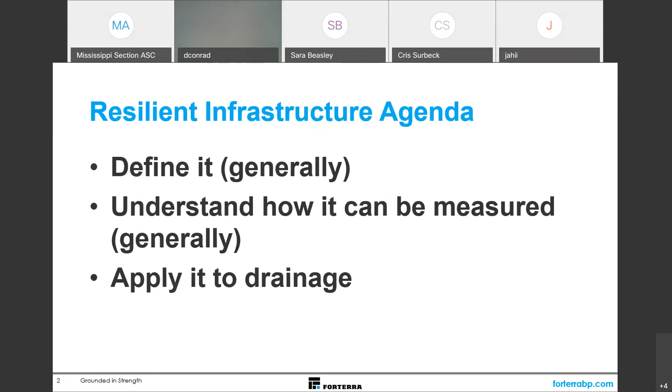You're also an English major, so we go to the dictionary. There are actually 2 definitions. One is capable of withstanding a shock without permanent deformation or rupture. And the second is tending to recover from or adjust easily to misfortune. And that's certainly true with our infrastructure, no matter what it might be, whether it's pipeline.

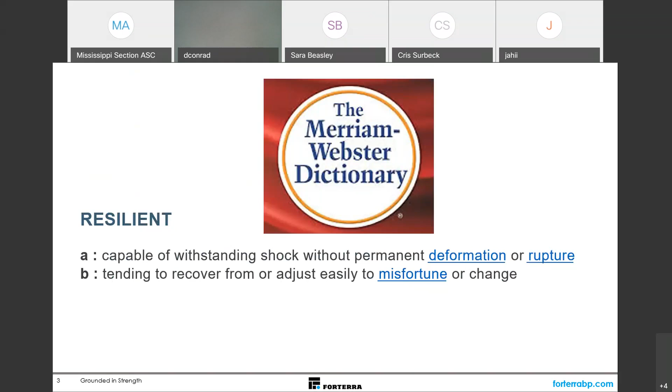This first question is off of this slide. I wanted to show that there are several universities in the country that have programs directly instructing on resilience: one at the University of Illinois, University of Georgia, one of our SEC schools, they have a PhD in engineering; Georgia Tech has an infrastructure systems research program; and Vanderbilt up in Nashville has a master's degree in risk, reliability, and resilience engineering. I'm sure there are other universities throughout the country with resilient programs, but these are 4 that we looked at.

The importance of resilience: number one, we want to improve the overall quality of the infrastructure systems. Secondly, we want to reduce long-term costs. Many times you might design something for the short term, but long term, as much as we spend.

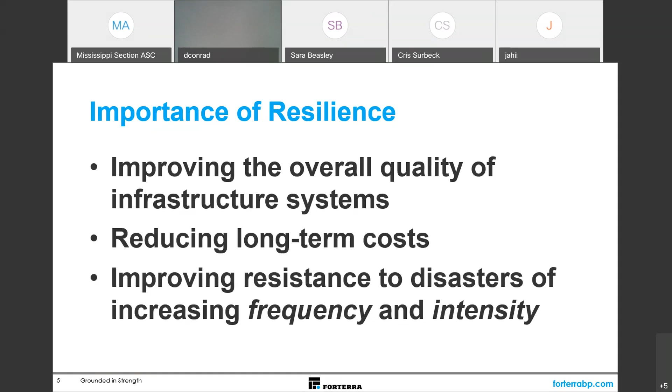Okay, so now we're back, I guess. So the second topic is reducing long-term costs. When you look at a project, of course, you want to look at not only the design and construction initially, but also in terms of maintenance and cost down the road, again, from misfortune that may come about. We want to improve resistance to disasters, and these are becoming more frequent and more intense.

Jennifer just went through the 2020 Mississippi Infrastructure Report Card. This is the last one, the national report card. And our grade, unfortunately, on the national scale is from 2017.

A D plus this year as well in Mississippi. So we haven't made much progress, unfortunately. The 2013 grade nationally was a D plus as well. So even on the national scale...

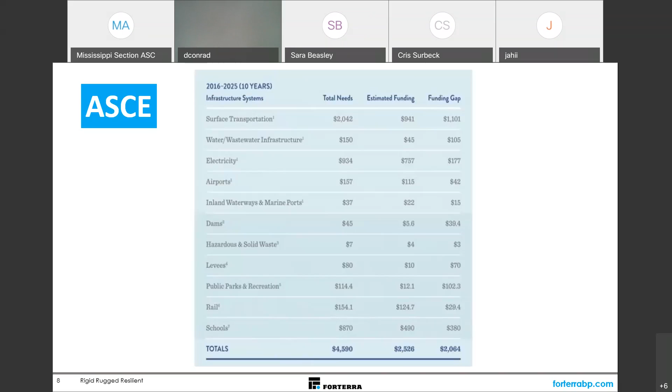This gives you an idea of the funding gap. You can see all the systems that are there. The funding gap, if you look, and this is from 2016 to 2025, 10 years, the funding gap is a little over $2 trillion. And that's quite a sum of money. And being a supplier and watching what funding is coming from the federal government and from the states, I don't see that making up a lot in that gap.

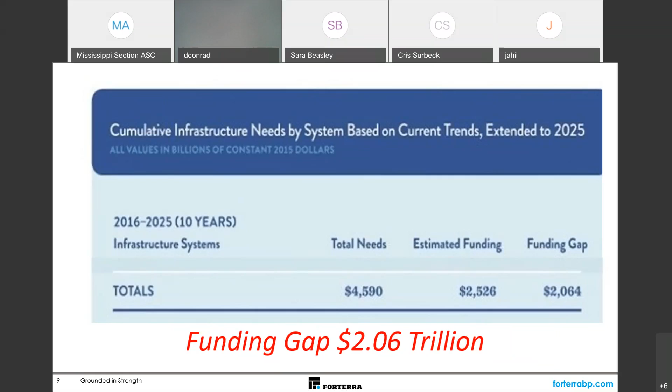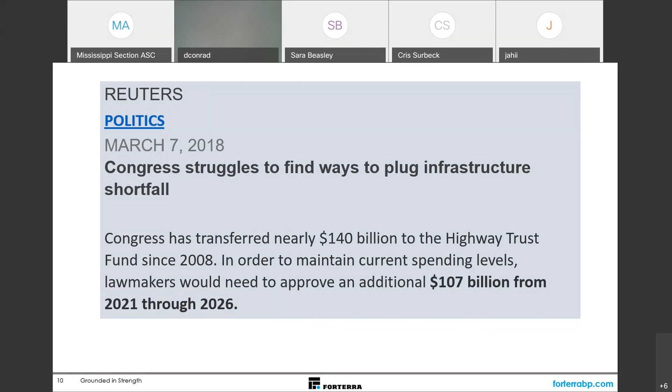This is from 2018, and we know Congress struggles all the time, but they struggle to find a way to plug the shortfall. Nearly $140 billion to the Highway Trust Fund. However, if we want to maintain those current spending levels, the lawmakers need to approve an additional $107 billion from 2021 through 2026.

And the key here is to look at resilience. You save a little today. A lot of times the low-cost material choice is the first choice. And of course, we all are aware that the majority of the time, the low bidder, the construction company that's the low bidder, is going to get the job. And sometimes that's okay, and sometimes it's not. And I'm sure all of you are aware of the different construction companies throughout your state, the ones that do a good job and some that may not do a good job. So the low bidder, even though it's what we want from a cost standpoint, sometimes it comes back to get us later.

And of course, if these occur, then you can pay a lot more tomorrow. Number one, premature failure. We had a situation with Mississippi DOT in Brandon just a couple of weeks ago, where unfortunately they had some concrete pipe that had been in the ground for 60 years, and the joints, because of the soils around Jackson that move - and you all in Jackson are certainly aware of that, especially if you're a geotech - they decided to take that out, but they got 60 years out of the pipe, so that's pretty good.

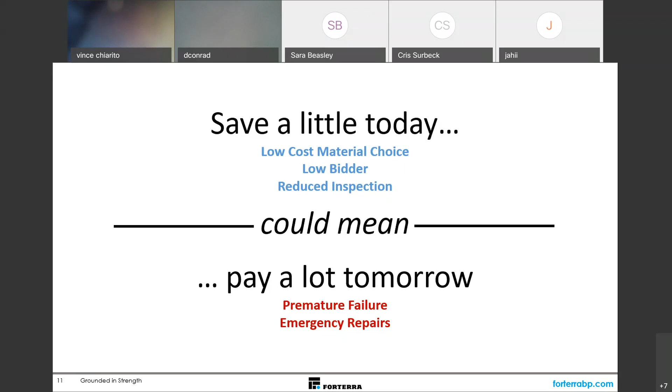And what happens is it's sort of like a parking meter. You know, you can get by with not putting money in a parking meter. You might get by 15, 20 times. But then at some point, you may end up getting a parking ticket, and that can be $40, $50, which will well outweigh what you may have paid in parking along the way.

Also, our phones - another situation that we have is our phone. Almost all of us, I guess everybody that I'm aware of, uses some sort of case for their phone, because inevitably we're going to drop it. And even sometimes the case does not do well, but that cost for the case certainly outweighs what might happen if you drop your phone and have to either replace it or put a new screen, whatever the case may be.

When we look at resiliency, and this is from an article out of Canada shown down at the bottom, their equation was resiliency equals future proofing. And their definition of future proofing is defined as the ability of an asset to continue to be of value into the future. And that's important - the assets for government, and it's important because they want it to continue to be of value. And it also, when you have resiliency built in and you future proof, it's required to ensure that taxpayers are being provided with value for their money. And the public certainly is expecting that today.

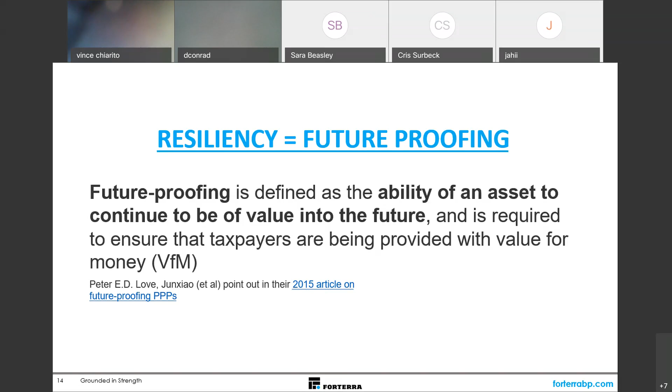This is from the National Center for Environmental Information. This is from 2019, and this was the weather at $1 billion. Each of these disasters shown here was $1 billion last year.

You can see, of course, we all heard about the fires out in California. We don't have to deal with that very much in Louisiana and Mississippi, thankfully. Texas does have an issue, but some of the others, and you can see the severe weather that was shown there, and tornadoes also. And of course, the tornadoes in April were quite unique. I'm sure you're aware, you had 3 EF4 tornadoes in a week, and that's very unusual.

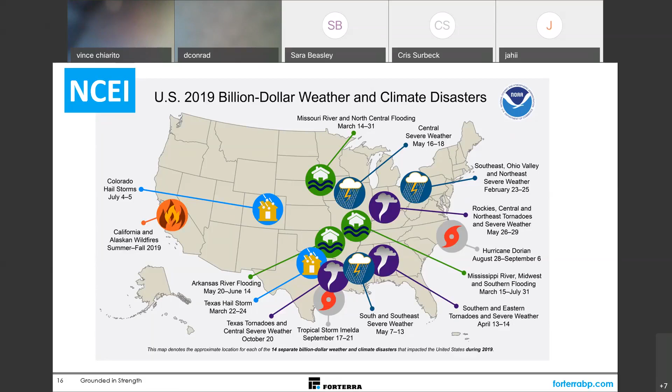One of them, I don't remember what day, but it came very close to our plant in Prentiss, Mississippi. Prentiss is about halfway between Jackson and Hattiesburg, and we were very fortunate - there was no damage at the plant. However, a lot of the employees had damage at their homes and their property. So it really held us up because we had a lot of people out, and not only that, with COVID, the same situation.

This is some of their information. You can see they've gone back all the way into the 80s. And you can see the numbers, and of course they just keep getting bigger - the number of events and the number of dollars keep getting bigger and bigger.

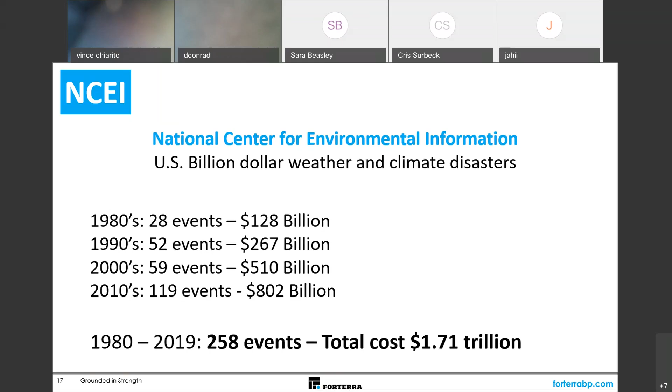You can see $1.71 trillion, quite a bit. And then this year, they didn't have complete numbers, but as of April, there had been 2 events that were over $1 billion, and it could have very well been your tornadoes in Mississippi. Could be one of those. I do not know, I didn't see the number on that.

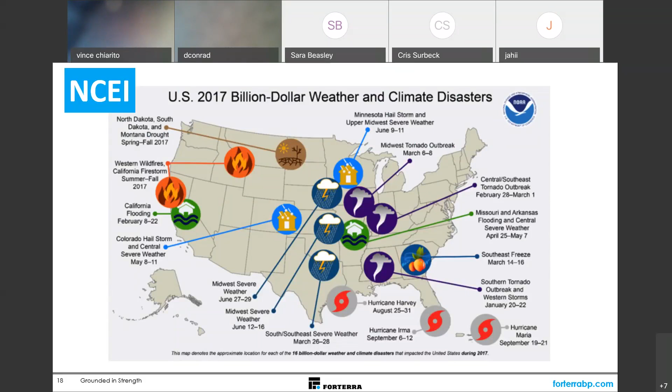This is from 2017. You can see all kinds of issues - again, the wildfires out west, tornadoes here, the hurricane that hit Texas, that was in 2017. So there are all kinds of opportunities for problems. 2018, through January through September, same situation - tornadoes, fires, hailstorms, all kinds of different natural disasters.

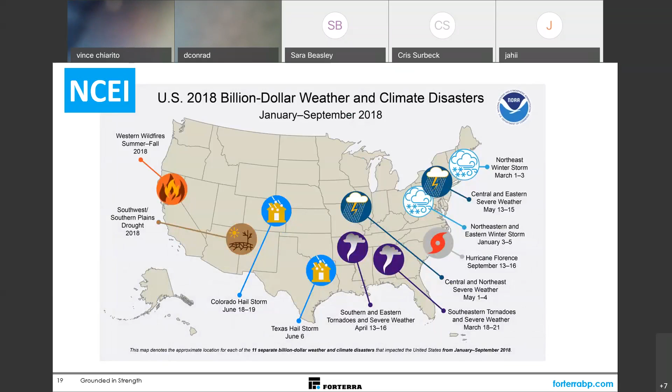So the natural adverse events, and of course we're very familiar in both Louisiana and Mississippi, the flooding, extreme heat, wildfires, earthquakes, tornado, and hurricanes. And those, almost all of those, can affect you and can affect the infrastructure that you have designed and built over the years of your careers.

Also, of course, we have man-made adverse events. We have system overload for one reason or the other. We also have oil and chemical spills, vehicle accidents, and then terrorism and vandalism. Thankfully, we see more vandalism than terrorism.

This is from the University of Buffalo. There's a PhD there, he came up with this triangle, this 4 R's of resiliency and resiliency triangle. And the point is, you can see over on the left, on the vertical axis, you've got the condition of your structure, and then you have time on the right, and then you have an event, and then a functional level. So he looks at this.

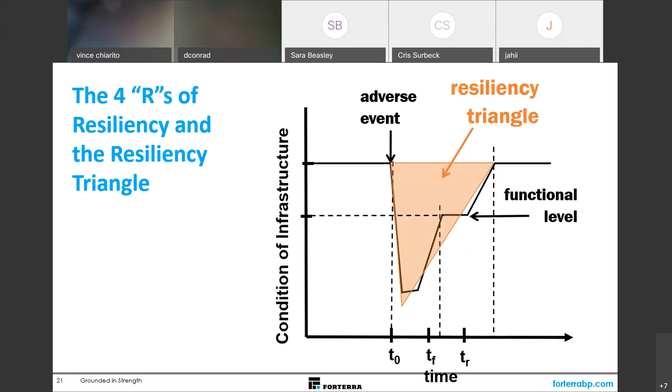One thing to keep in mind, I did a little research on this - the gentleman that did this was looking at earthquakes. He was not looking at events that typically we would see here in the Southeast. And that's what the triangle looks like - of course you see the event, and then the condition of the infrastructure goes down. You have a period of time, and then it gets back up to a functional level, and then finally, hopefully, back to the initial structure quality.

The first R that he talks about is robustness. And this is a higher level of initial quality that's able to withstand unforeseen demands. And it's important for all your systems - it makes no difference. Most of what I'm going to talk about is drainage, but whatever systems that you all are designing, they need to be robust and of a very good quality.

And you can see on his triangle here, when you talk about robustness, you may increase that condition of the structure ahead of time, which results in that resiliency triangle being smaller and the time frame, which is most important, being shorter as well.

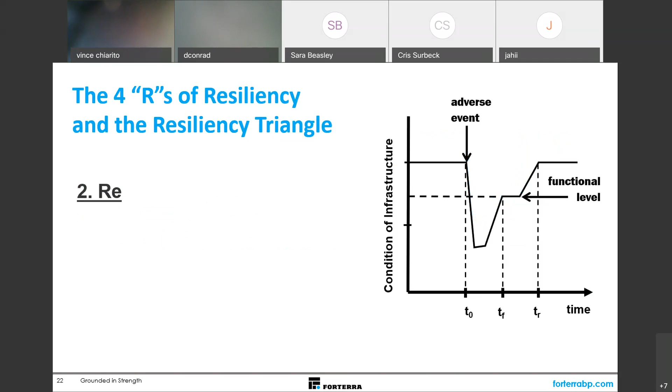Redundancy - the definition is a measure of inbuilt sustainability that can keep infrastructure functional during an event. And it depends on, again, what you're building. In his case, looking at earthquakes, he was more concerned about how buildings and external structures could be built with redundancy to keep that from happening. And you can see if the redundancy is built in, then hopefully the function level will be higher - you won't have as much of a triangle there to get back to a normal condition for the structure or for the infrastructure.

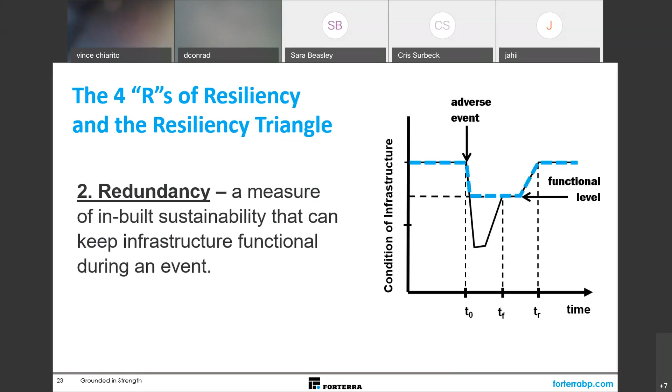Resourcefulness, from an operational standpoint from the owners, is their ability to minimize and contain the negative adverse event. If they're resourceful and ready, everything gets back to normal pretty quickly. One analogy I can use, not in Mississippi but here in Louisiana, was the pump system around New Orleans during Hurricane Katrina.

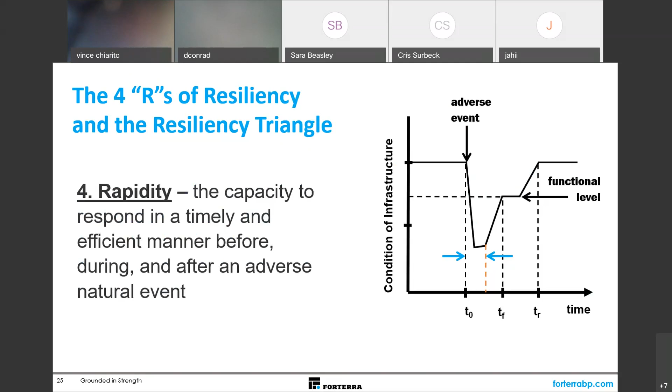The resourcefulness is very important to minimize those negative effects. Then the last is rapidity, which is the capacity to respond in a timely and efficient manner before, during, and after an adverse event. It's important to be able to get in and get things back to normal. Again, during Hurricane Katrina that did not happen, and of course some of that happened on your Mississippi Gulf Coast as well during that event.

To respond is organized and thought about beforehand. I want to back up one minute. I did this one, as I mentioned, for earthquakes. I did find that the American Road and Transportation Builders Association has 4 R's of resiliency for transportation, and it was a little bit different for robustness. They talked about having movable barrier technology in work zones to be able to get things back quickly.

Redundancy, their topic was to replace trusses with cable-stayed and network arches on bridges. They were speaking about bridges directly. Resourcefulness, it was very interesting, they talked about mapping GIS systems and redirecting traffic, and that's obviously important as well.

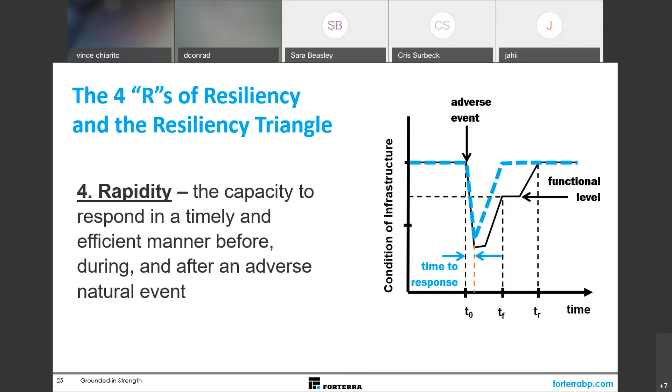And then the last, rapidity, they discussed. One thing that we in the precast industry push all the time is accelerated bridge construction, and we work through the American Concrete Pipe Association and through the Federal Highway Administration on accelerated bridge construction.

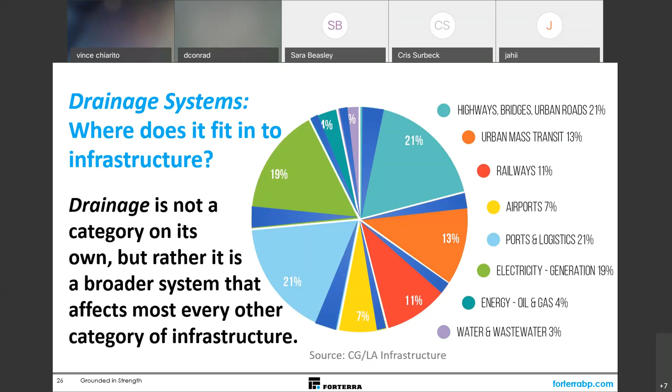Now, adverse events affecting drainage systems, there are many. We looked at them earlier with the billion-dollar events, but we have fire, flooding, vandalism, earthquakes, and shifting soils. That hits home in the Jackson area for sure. Thankfully, we don't have to deal with freeze-thaw very often. Vehicle accidents, everyone has to deal with those in the aftermath, and then extreme temperatures. Certainly Mississippi has extreme temperatures, mainly on the high side, but extreme temperatures are certainly part of it.

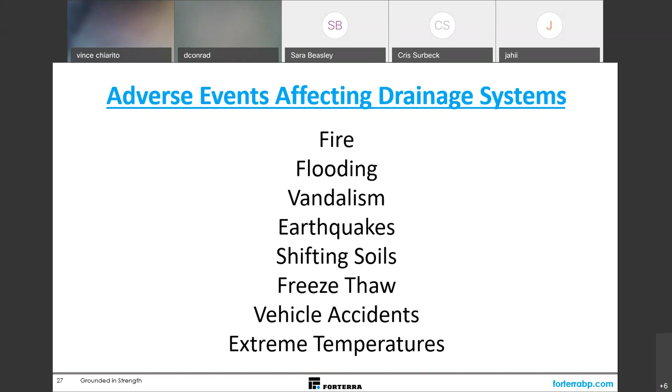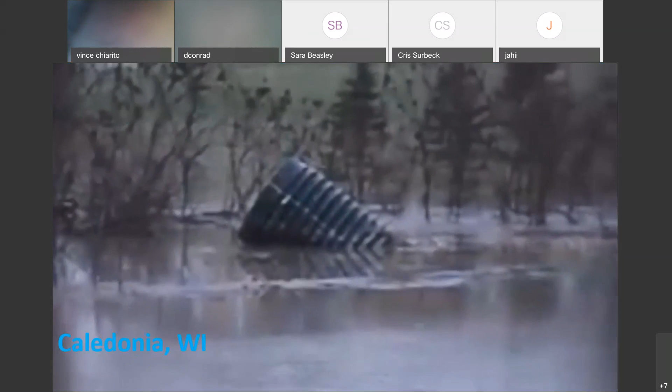We're going to look at flooding. Of course, any kind of flooding affects the drainage pipe. I have some videos here. This one's in Wisconsin. Luckily, it doesn't appear, based on this video, that the roadway was damaged, at least not major damage. But the culprit here is the pipe in this case, and that occurs rather frequently.

This next video is from East Texas. It has some rather colorful discussion about what's happening.

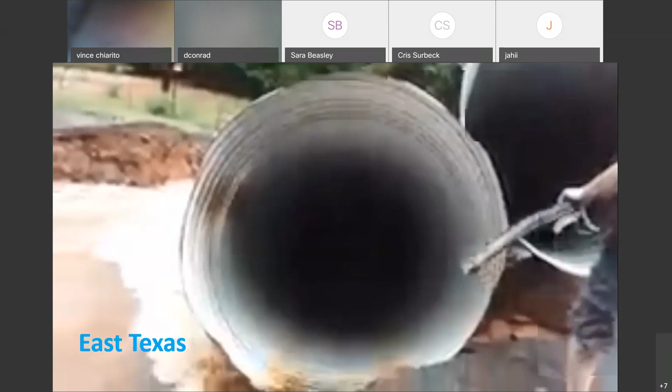I don't see it on either end. I didn't see any head wall on this pipe, and obviously that creates issues if you just put pipe in and it's not sized properly. Without a head wall, it can create problems, and you can see here, obviously this was a serious rain event that this occurred.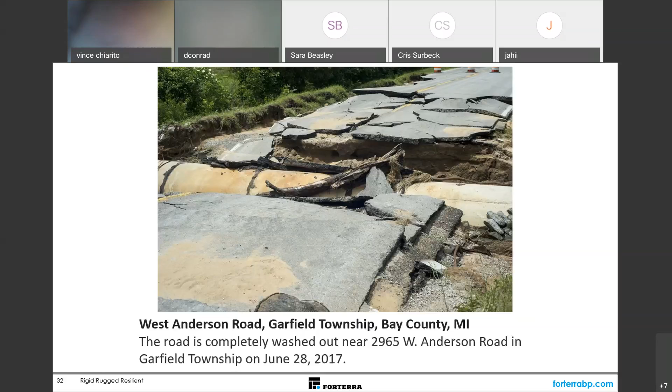We don't know all the details about this, but obviously this is a pretty serious failure. Again, typically you can see it's a 2-lane road. We can't see whether there's head walls or wing walls on either side, but this type of failure occurs to every type of pipe.

This is one up in Georgia, back in 2009. It was corrugated metal pipe. The key here, and I'd venture to say all the engineers on this webinar would agree, is that there's no reinforcement in that head wall. I'm pretty sure any engineer designing that head wall would put in some rebar or reinforcement. My guess is the contractor didn't put it in to save some money. So even with a head wall in this situation, you can see you have issues all the time.

This is up in the Atlanta area, where they have that red clay, and when the water gets started in there, it erodes quickly. So the system obviously failed, and the biggest problem here was the detour around this road, which caused a lot of public issues.

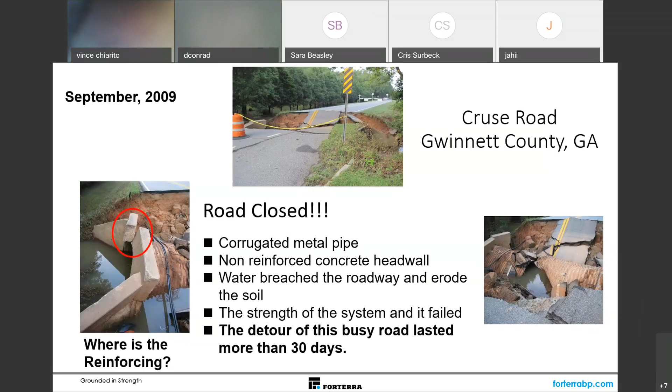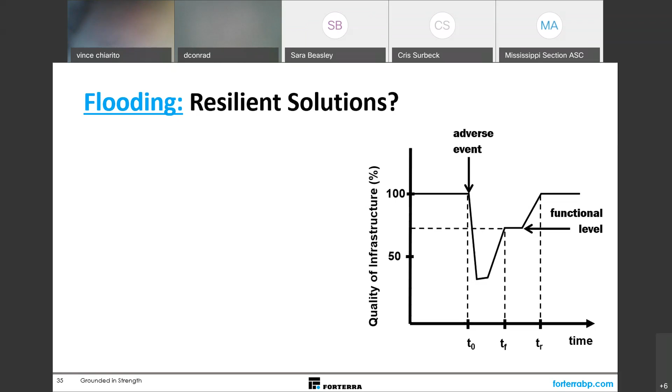For flooding, let's go through the question. Number one, a resilient solution is to build a proper head wall to provide scour protection around the inlet. As we've seen in these previous pictures and videos, a proper head wall is important. The precast concrete industry offers precast head walls, wing walls, and aprons, but most engineers, probably 95% that I've dealt with, prefer to have the contractor cast it in place because of issues that may occur if things don't line up, and I certainly understand that. But we certainly recommend that you put a head wall around your pipe.

Second is, of course, to use riprap to reduce the velocities, using non-floatable material, and then oversize the culvert to avoid a submerged inlet. Now, that last one, if you have to oversize a culvert, it's going to cost you a lot more to start. So hopefully you can use the other three topics to make sure that if there is flooding, you don't have those issues.

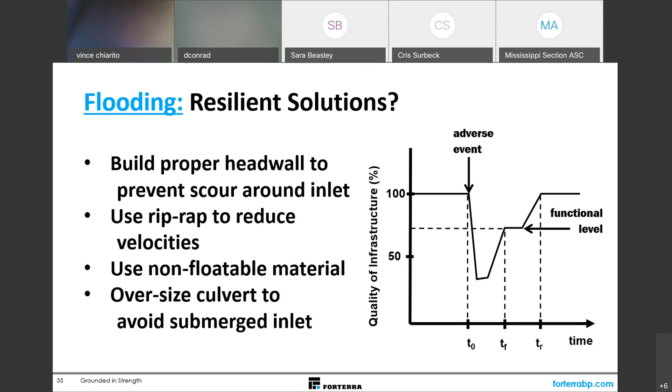Wildfires are not typically a problem in your state in Mississippi, or here in Louisiana where I am, but they are an issue. This is from Stoneburg, Texas, back in 2009, and they had wildfires. I'm assuming Stoneburg must be in the western part of the state, but a wildfire ignited a triple line of 60-inch HDPE pipe, and the road collapsed. You can see the collapse there. Emergency response vehicles, there was one that ended up down in the ditch.

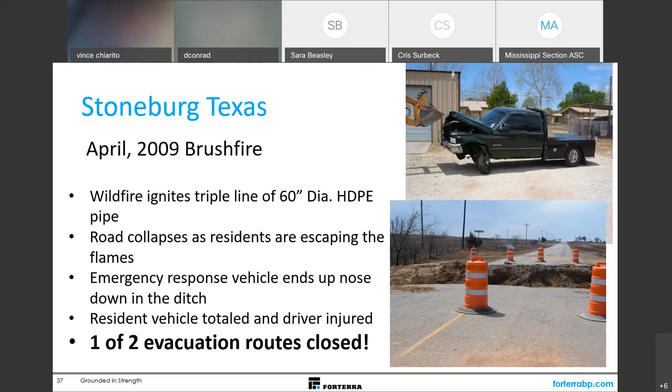And a resident ran into it as well and was injured, as you can see in the picture on the upper right. Thankfully, nobody got hurt seriously, but the bigger issue for them from a brush fire situation is that from that little town, there were only 2 evacuation routes. And so when this occurred, they have a difficult time getting into this little town.

Now, as a result of that brush fire, the Texas DOT revised their use of plastic pipe. The restrictions that they put on roadways with current ADT less than 2,000 vehicles per lane: the inside pipe diameters no greater than 36 inches, so they limited the diameter. And multiple pipe installations will be limited to a maximum of 2 adjacent pipes. And then for pipe installations beneath and adjacent to the road...

...safety end treatment. And of course, the reason for that is that the concrete won't burn. So if a wildfire does come through and it does get to the culvert, it's not going to catch the plastic or whatever other material that might be there.

Interestingly, I attend - if some of you all have probably attended this - the Mississippi DOT has a maintenance conference every year. Unfortunately, it's been canceled this year. But it's been very interesting talking to all these maintenance folks from around the state, and they use a lot of plastic pipe, flexible pipe, for driveways, which is certainly understandable to do. But they said a lot of times the issues that they have is the homeowners in the fall will rake all their leaves into the ditch line.

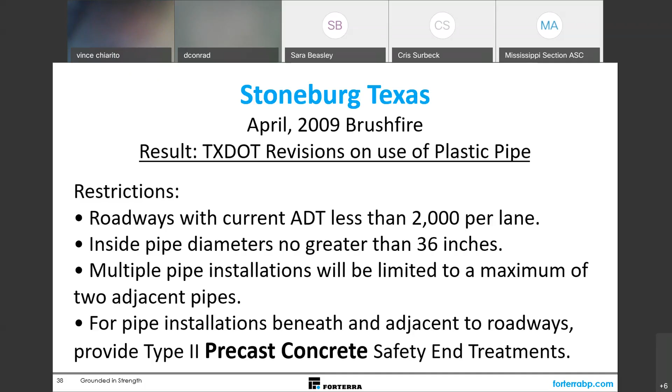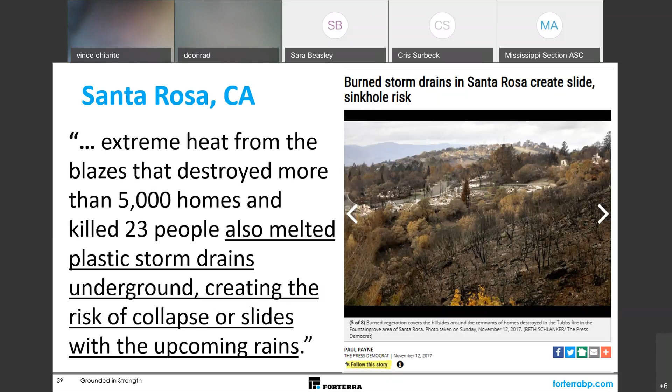Very interesting. Now out in California, they have really real issues with wildfires out there. Of course, they have extreme heat. You can see this one was in 2017, destroyed homes, killed people, and it melted the plastic storm drains. Again, the collapse, and then the problem that they have out there, of course, they have lots of mountains and lots of relief, and so after it rains, then after the burn, and then it rains, then they have flooding issues on top of that. So they have the worst.

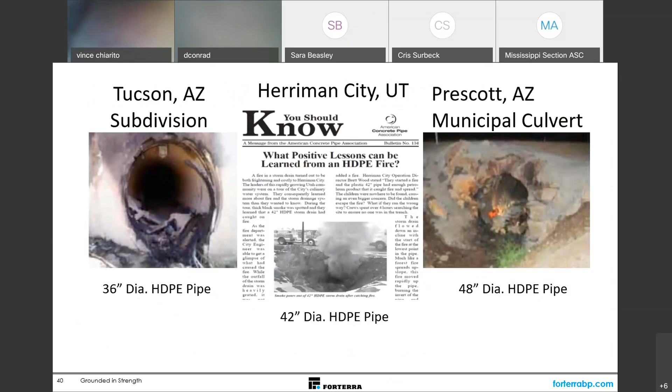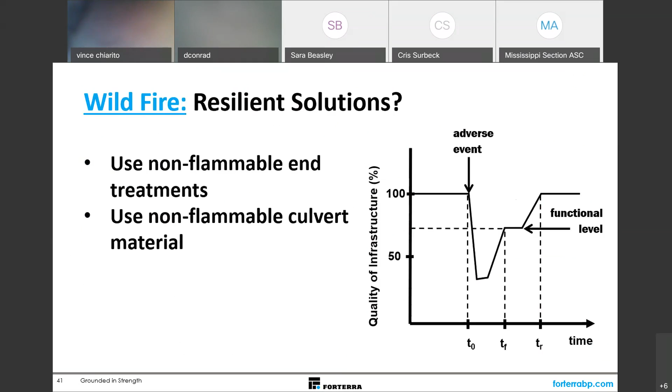And then these are from Arizona. Both of these, again, mostly in subdivisions, and you can see the HDPE that burns and will collapse. So for wildfire, the resilient solutions, as TxDOT did, you use non-flammable end treatments and possibly use non-flammable culvert material.

Adverse events, obviously, for pipe is fuel truck accidents. It doesn't necessarily have to be a fuel truck, it can be any kind of a truck. I have a video here that you can see. This is, as you can see, in Mobile, Alabama.

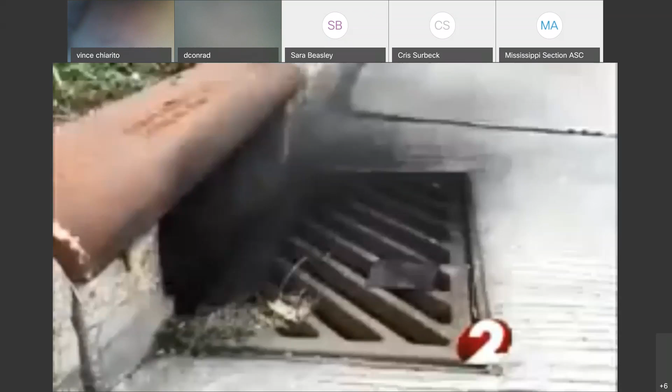I want to back up a minute. I know you all certainly saw - whoever put that video together - for some reason they put LA instead of AL. So that was Mobile, Alabama.

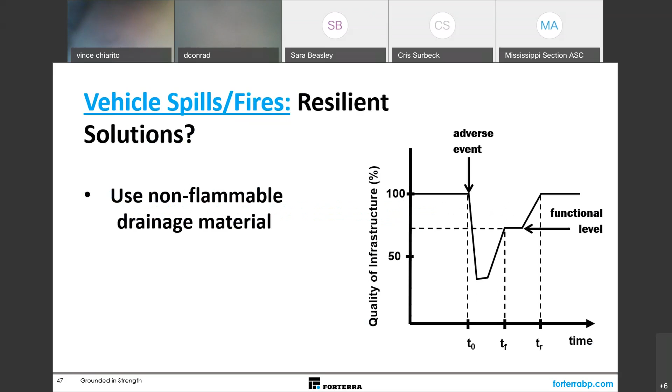But of course, the fires, those are issues that we deal with, especially not so much for you all, but especially here in Louisiana. We seem to have more than our share of truck wrecks. So the solution for this is to use a non-flammable drainage material, and essentially that's all you can do. But obviously you can't predict when you're going to have an incident. And then we'll talk about vandalism as well, and that occurs on a regular basis.

I'm not sure why they would do that, but apparently they did. So, vandalism, for resilience, resilient solutions for that: number one, restrict access to culverts using trash guards and locked manhole lids. Now, of course, the issue is if you put a trash guard over a culvert, that is going to affect your flow, and all the material, the debris and all, is going to get caught. So it's sort of a catch-22 for that one.

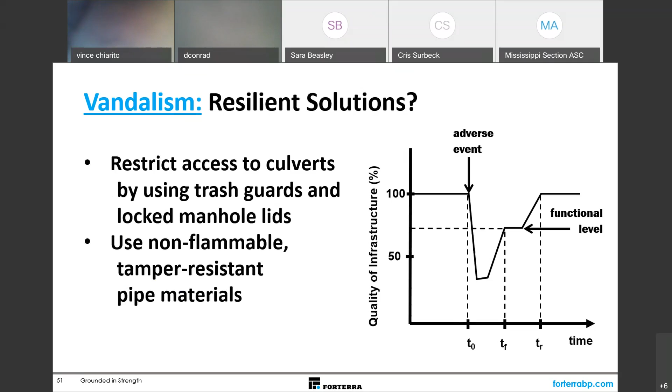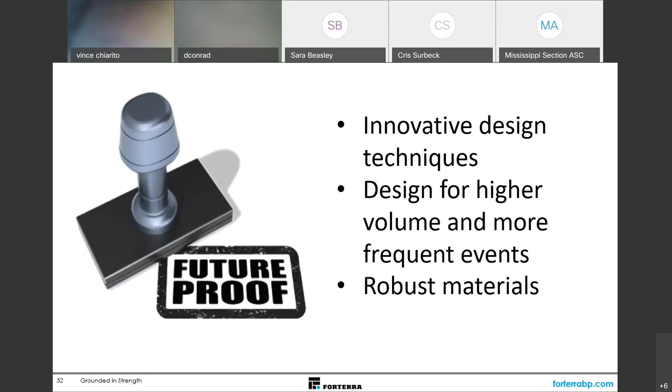So we look at future-proofing and innovative techniques. There's new ways of doing things. Again, you can design for a higher volume and more frequent events. That depends on what your owner is looking for and what they're willing to pay for. So it's a balancing act for you all as design engineers, and then of course to use robust materials.

And of course, we talk about precast. Our resilient infrastructure is, number one, of course, non-flammable. Number two, it's heavy - that's, of course, what the contractors complain about, they say your pipe's too heavy, but it is resistant to floating. You don't have to worry about it floating out when you have a flood. It is a robust and a trusted and proven design, and we have a proven history of long-term performance. We have many installations in Mississippi that have been there for in excess of 100 years.

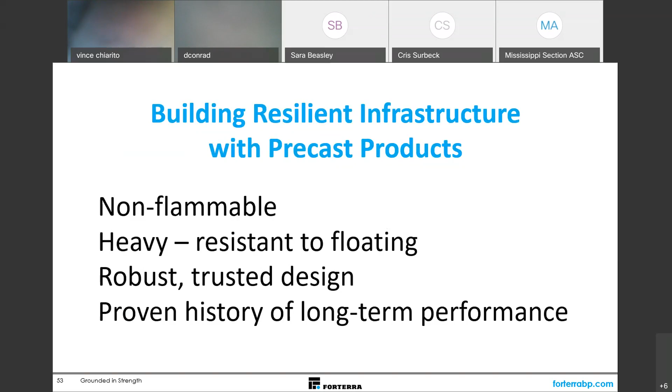So we provide resilient materials to future-proof our infrastructure. And that is the end of the presentation. If anybody has any questions, certainly I'll be happy to hang on and answer them.

Thanks, Dawn. I am typing the questions. Oop, thought I was typing the questions. Yeah, I saw them.